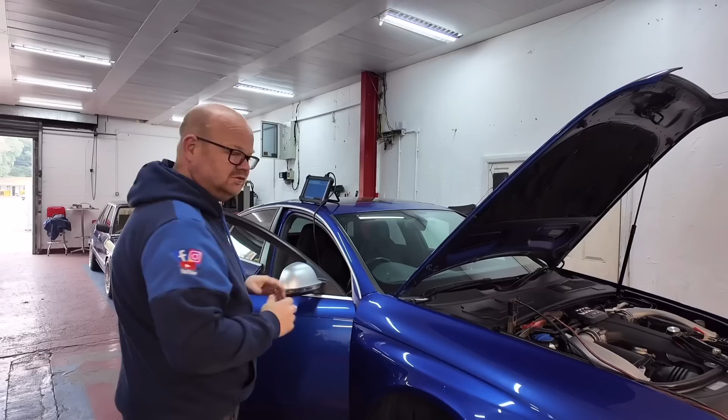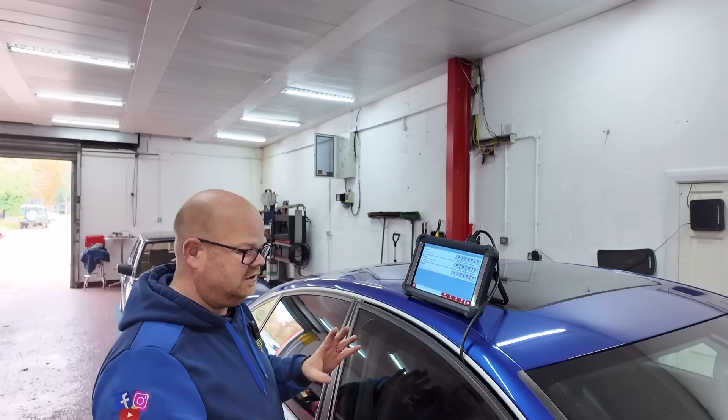Look at this, 2009 RS6. She's a beauty. In fact, let me show you this, see if you can see anything different on this. Something not quite right on this one, tell me what it is. Right, so this car's been presented to us with an adaptive headlight fault and a suspension damping fault.

So the customer's already changed the level sensor. That lasted a little while. Then the light came back on, so he's changed the headlight level control module. And now he needs to find out what's going on, why it keeps coming on. But it's a permanent code. Let's have a look.

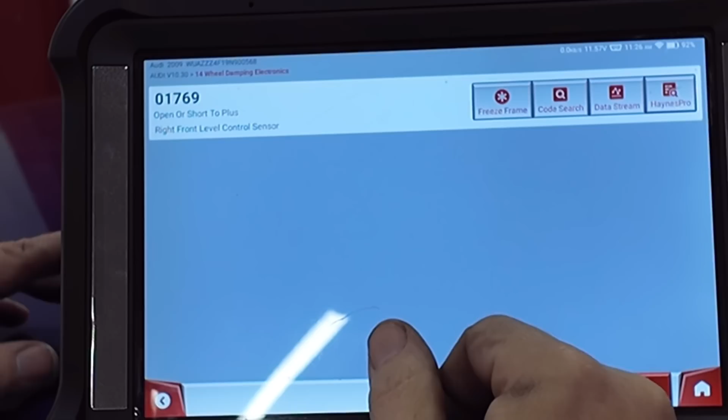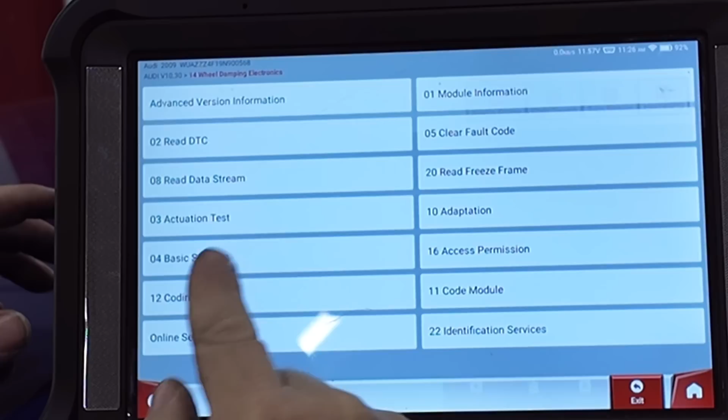Okay, so in wheel damping, we've got open or short to plus, front right level control sensor. So that's obviously your front level sensor. Let's have a look in headlight range. It's got 3 faults in that one. Right, so the control module, which is already changed, isn't coded to the car. It's had no basic settings or adaptations done.

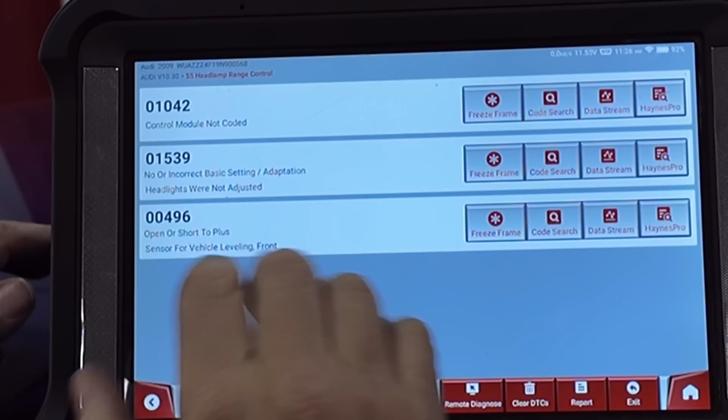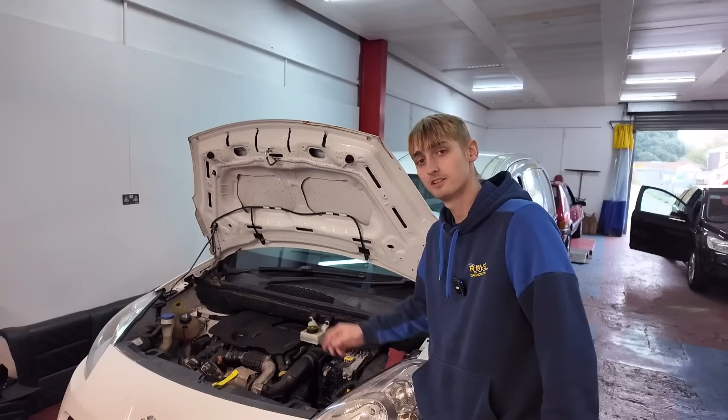And we've got open or short for the front level sensor. So it looks like we've got 1 fault. What we're going to do is put the original control module back in, see if these 2 clear, and see if we've just got the level sensor fault on there. Let's go from there. Welcome back to our regularly scheduled show.

We've got a Peugeot Partner. It's come in with a fan fault. The customer stated that when you turn the engine off and the fan's been running, it doesn't stop until the battery goes flat. So I did confirm the customer complaint. And yeah, it just keeps going and going. So I disconnected the battery, made it stop.

We've got a couple of codes in there, so I'm going to take you around to the scanner and show you what we got. We got one for outside air temperature sensor and glow plug fault. Both of them can set the fan off. So we're going to find out which one it is, rule it out, and I'll show you the testing procedure for this one.

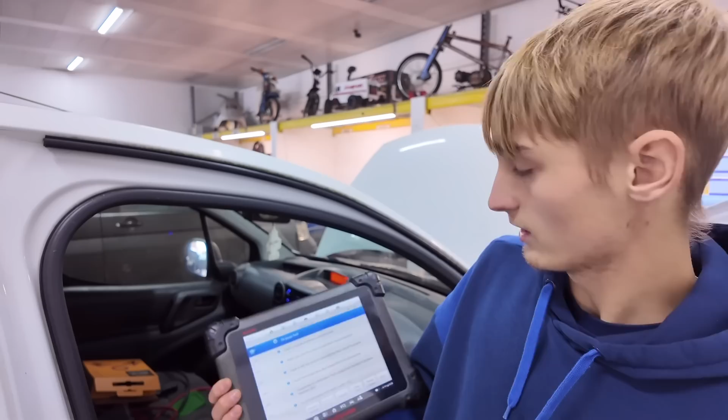Right, ladies and gentlemen, here we are. We got a fault in the BSI for outside air temperature sensor. To find out which one it's going to be, either the glow plugs or the outside air temp, I'm going to go into the BSI on the scanner, deactivate the outside air temperature sensor, run it up a little bit and see if the fan kicks on.

If the fan doesn't kick on, we know it's this. If it does kick on, we've still got a fault somewhere else, so we'll have to do more testing. So I'm going to do it now, live on camera. External temperature sensor present. We're going to make that absent. Configure. There we go. It's absent now.

So we're going to start it up, give it a few light revs, because last time it came on after 2-3 revs and literally about 5 seconds. We'll go around to the front. Right, so we've revved it up, run it up for a minute, and the fan shouldn't be on. And there you go.

So that shows that we've got a fault with the outside air temperature sensor, and that's what's causing the fan to kick on and stay on. So now we're going to go to the outside air temperature sensor, make sure we got what we need, run some tests on it, and see what it tells us.

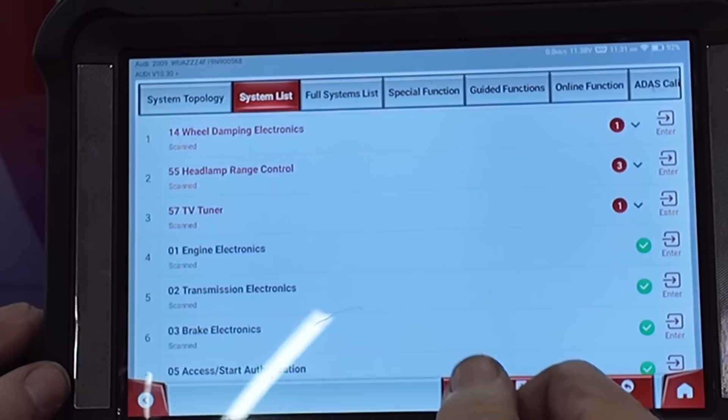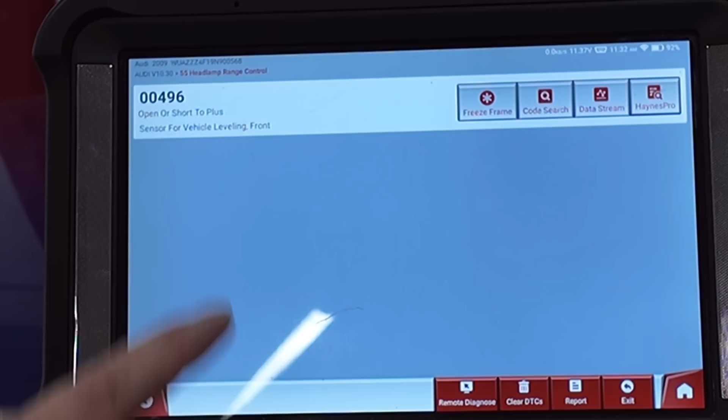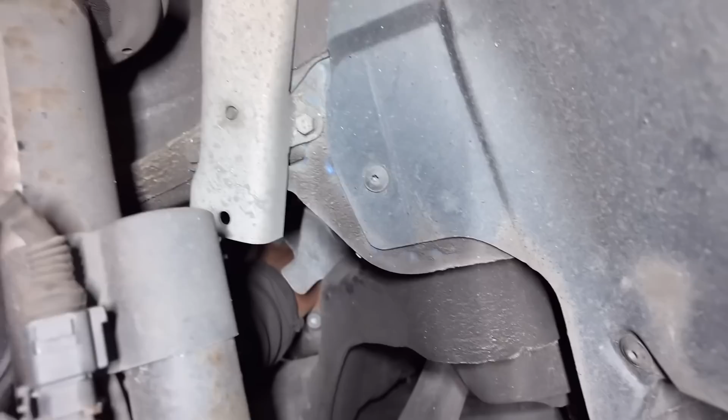Right, so we've put the original headlight range control unit in. The coding faults have gone, so we're still back just to the level sensor. So we know it's not down to the module. Let's start doing some testing. So this is a bit of a weird one. We've had a look into it, jacked it up, and it's got no real level sensor on it.

So we look the other side. We've got a level sensor on the left hand side. So apparently it's got a right hand level sensor fault, and it doesn't have one down there. It's got no wire in there, it's got no arms there. The part where it bolts on is just not there. And the light was on when he bought it, so it's not as if somebody's removed it or anything like that. So not really sure what's going on there. It's a bit confusing.

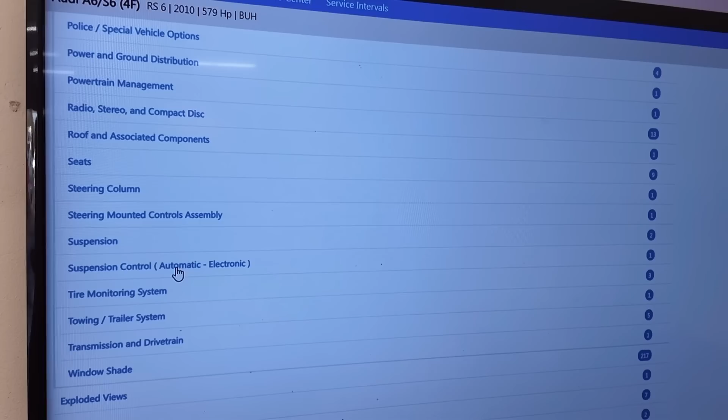So I've disconnected that sensor, the other side, and it still says right hand side sensor. In the headlight leveling, it just says front sensor. In the adaptive, it says front right, but it hasn't got one on the front right. So we're going to check the diagrams, see what that says. Right, so as you can see, we've got two different types of suspension on this. So we've got adaptive suspension from 2006.

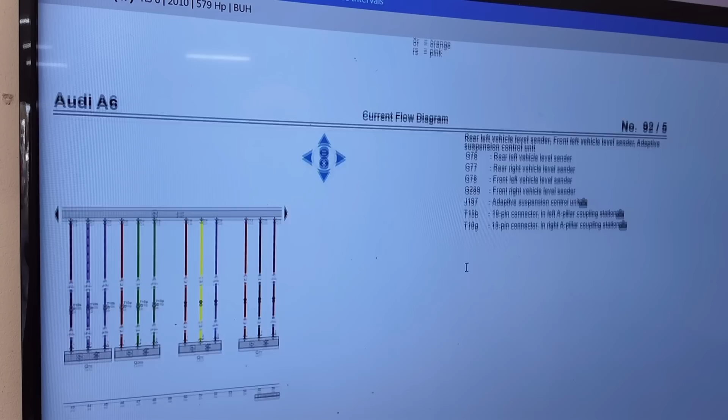And on this, it shows 4 strut valves, which apparently this has got, and 4 level sensors. We don't have 4 level sensors, we've only got the one. So we came out of that and went back into the other suspension setup, which was down here. So automatic electronic for the RS6, which I've got.

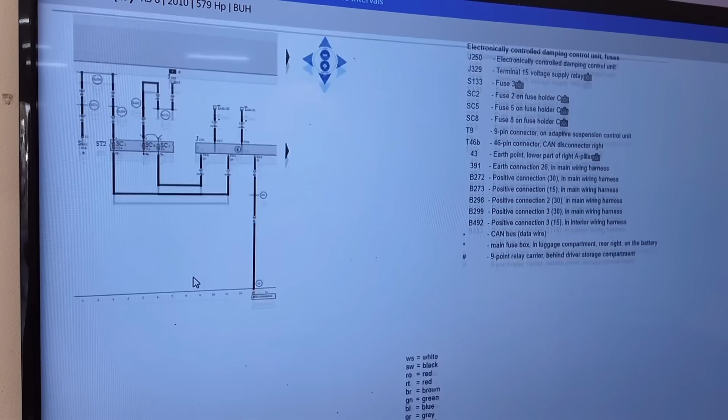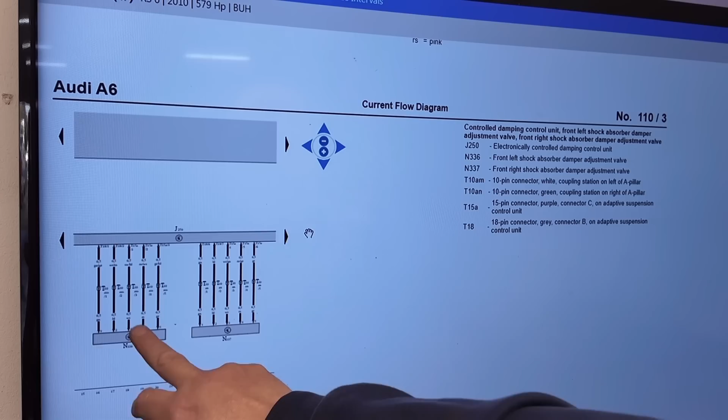So if you go into RS6, it just has front left shock absorber, damper and adjustment valve, but that has 5 wires going to it. So what we're going to do, we're going to disconnect the left hand side one, see if we get the same sort of code up, and then we'll see whether we're going down the wrong route or what's going on. So right, let's go and have a quick check over.

Right, bit of progress on it. We've just connected up that front left-hand height adjuster. That code's cleared in the adaptive lights. No lights on, no nothing. So possibly a bad connection on that. Still got the code for the right-hand side height sensor, or whatever it's called. Let us go into it now.

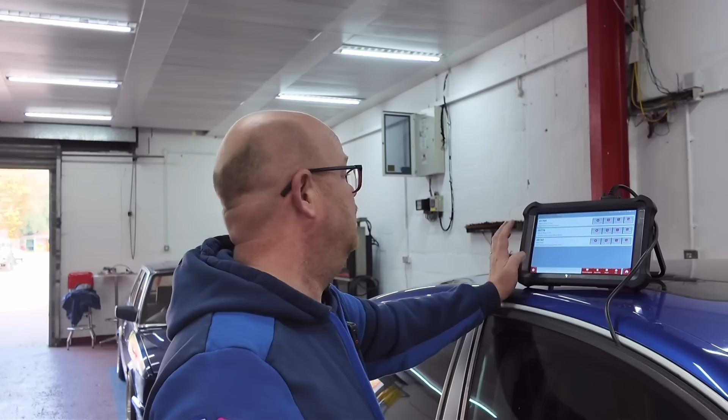So front right level control sensor. So we know we've got a fault on this side. I've disconnected the shock the other side, damper, whatever you want to call it, and that's come up with front left level control sensor. So it looks like the sensors are actually built into the shock, not that level control. Because we've got 2 faults and the customer's already played with it and they're telling us, oh yeah, it's this, it's that, sort of throwing us down the other direction.

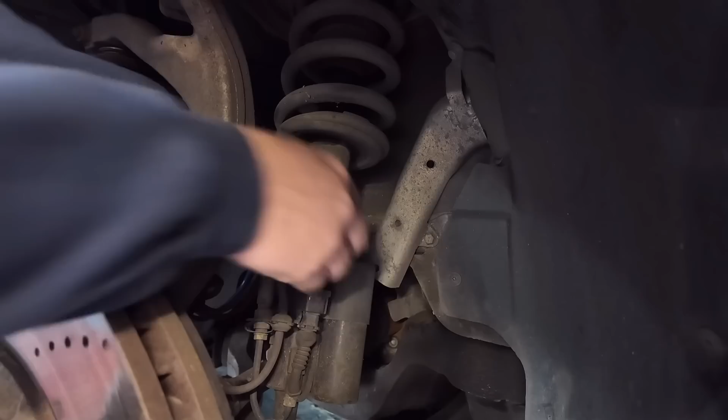So we sort of know that we've got a fault on this side. Luckily, because we've got the other side off, it's all jacked up, wheels are off. We can check what we've got on that one, check what we've got on this side, and see what's happening. So, we're just going to do a quick check. So we've got a Carlos Fandango camera thingamajig. I haven't even got a torch in this. Look how bright it is. That's all coming from there.

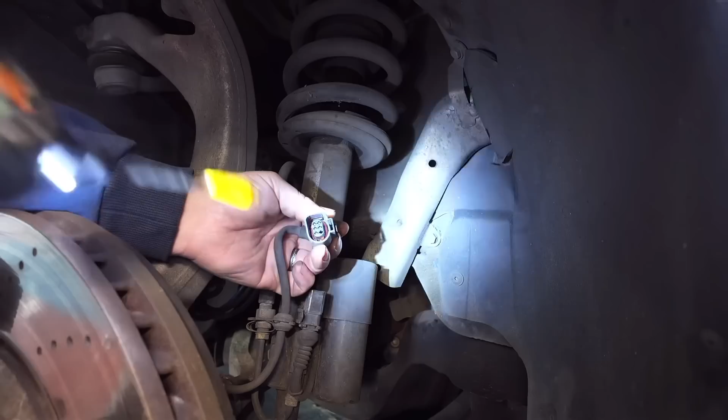So, I'm going to do a quick check on these pins, see what we got. So we've got an earth, 2.2 volts, earth, 1.5 or 2 volts, and a dead wire. So pin 5 is completely dead. I'm just going to check the other side, see if that's meant to be like that, and do we need to get the control module out and test backwards, or have we got a wiring fault where it flexes.

So we've got an earth, 4.9, earth, 5 volt. So this number 4 was about 2 volts the other side. This is 5. And the one that was dead has got an earth to it. So we've got an issue on this pin on the other side.

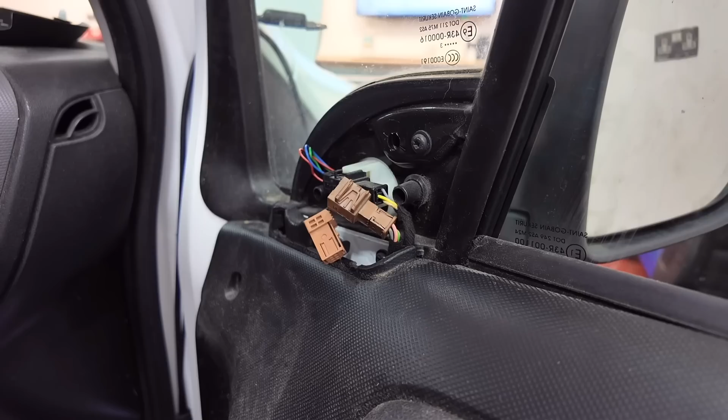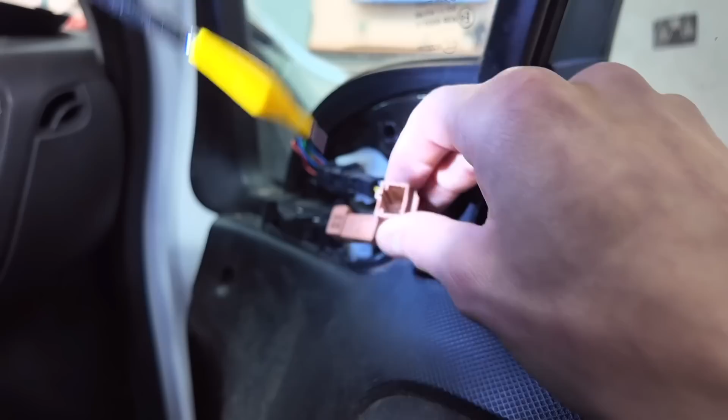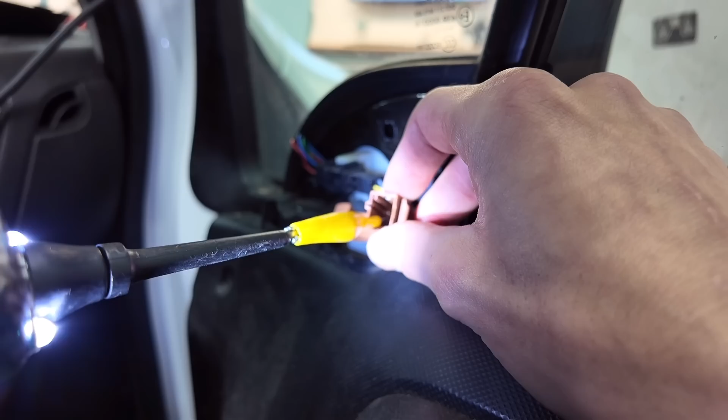So this is the plug for the outside air temperature sensor. It is actually in the bottom of the wing mirror, just down there. So what we've done is we've pulled it. We're going to test that we've got our live and earth. It should have about 5 volt and a single earth in there. So there's the earth. And there's no live on it, so that changes the ball game slightly.

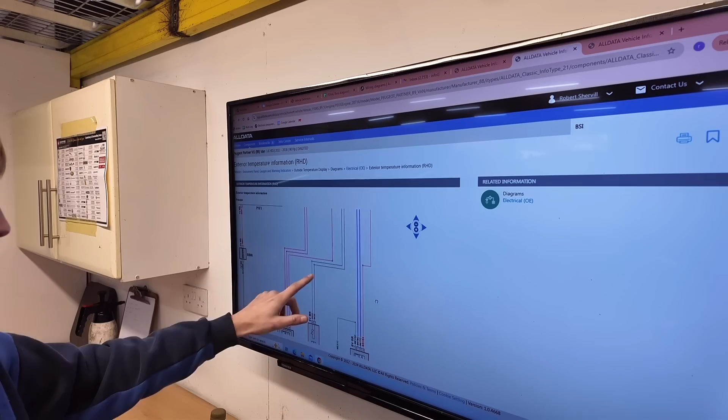So I've got the wiring diagram up for the sensor. This is the outside air temp, and it goes all the way back up to the BSI. So what I'm going to do is go over to the BSI, get it all stripped out, and we're going to test the live and earth at the BSI, because if we've got live and earth there and just earth down there, that means we're going to have a broken wire somewhere between the BSI and the sensor.

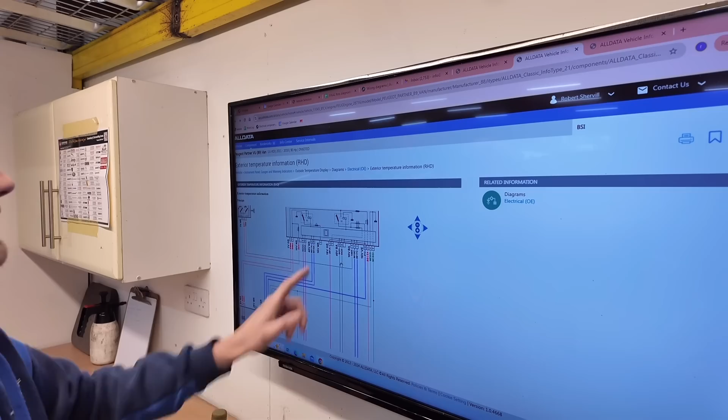So these are 2 wires we're going to be testing. It actually took us about 5 minutes to work out what plug BA was, because it's not listed as BA on the BSI. So we had to get another diagram up.

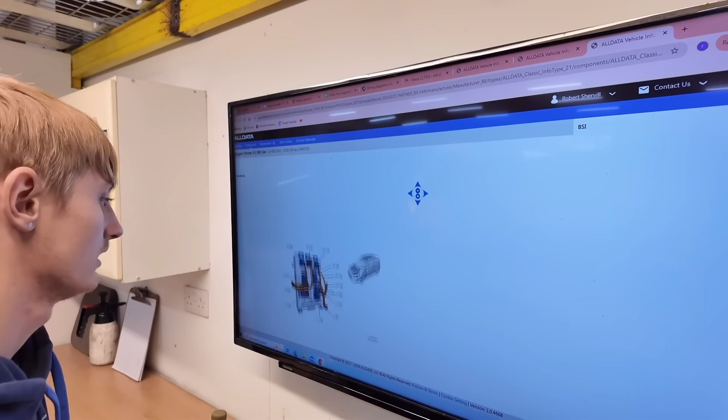This is the BSI unit. BA is that plug there. But just to make sure that we had it right, we came over to another pin out diagram. So the BA is actually EH1. So we're looking at pin 8 and pin 18, there we go.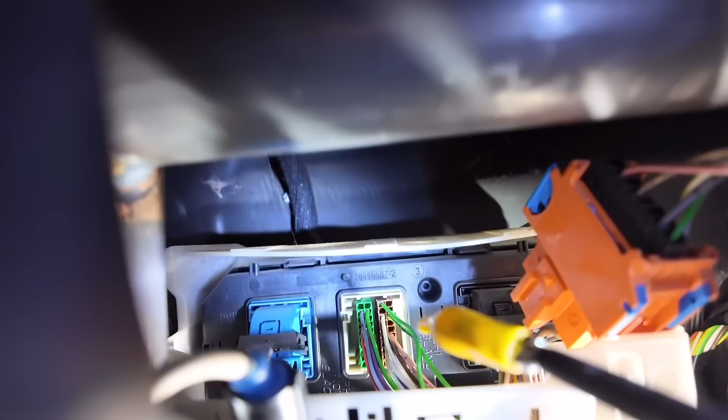So we're going to go to the BSI, test our live and earth from there. So that little brown plug there is the one we're looking at. That white wire and the green one next to it, this one here, are the ones we're testing. So that's the earth. And I don't know if you can see on there, but we've got 4.6 volt. Right, so that means we've got a broken wire between the BSI and the sensor itself.

So we're going to look at the most likely place it's going to be, which is where the door crease is, where the loom comes from the door into the car. We're going to have a look there first. If it's not there, we're going to cry ourselves to sleep at night, because it can be anywhere. Right, as guessed.

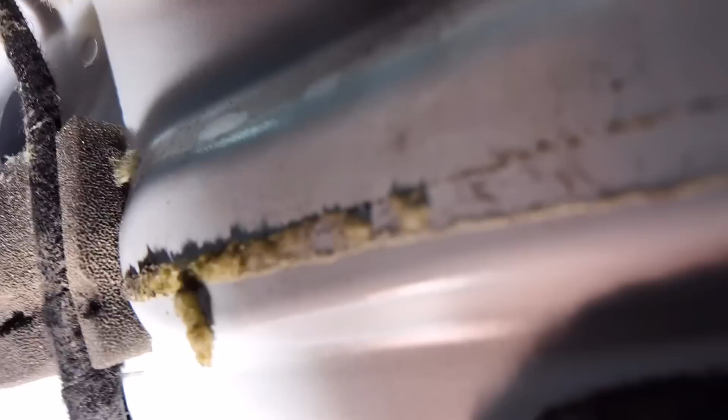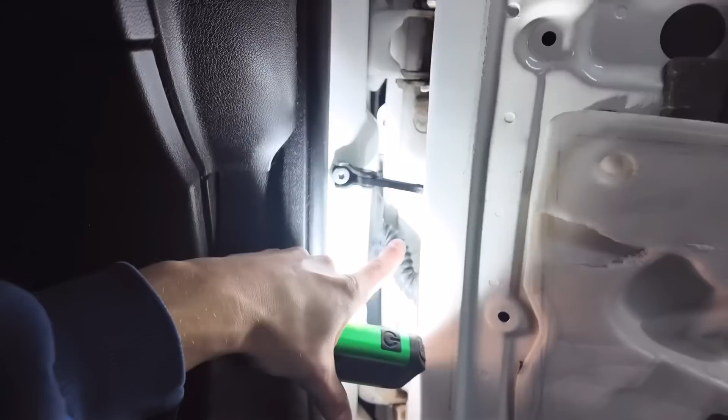That is the wire for the outside temperature sensor, and it's broken off inside the door, so we're going to have to get that bit of trunking off, do the repair, put it all back together. Job's a carrot. So I'm going to repair that, and I'll come back to you when it is done.

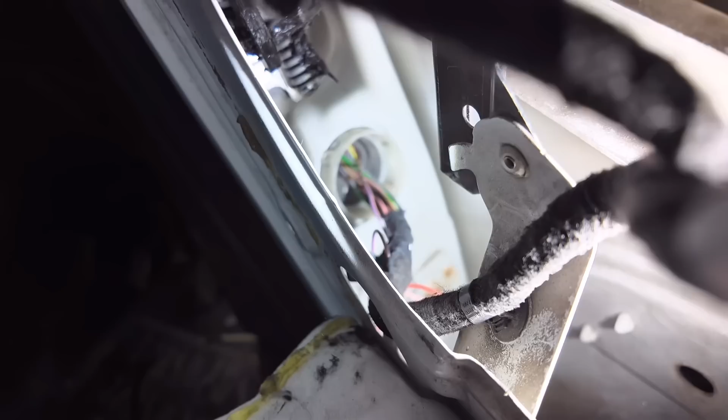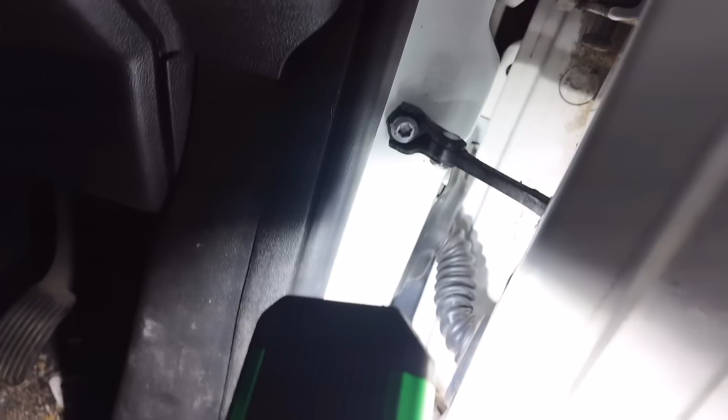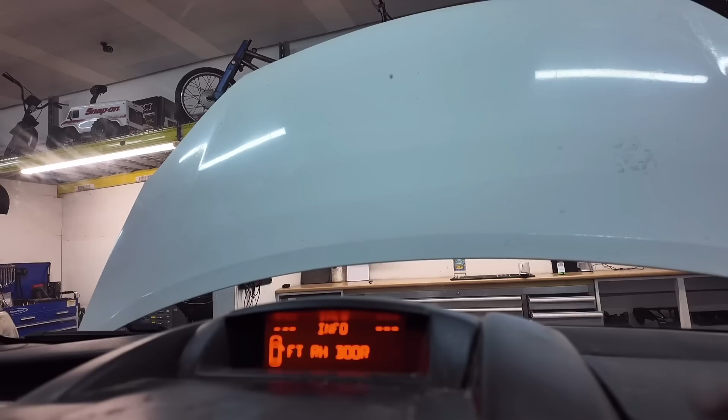So as you can see, that wire there's my repair. What I've done, I've run a new length of cable all the way through that little trunk in there, soldered it all back up, and I know it's working without even starting it up and running it up, because is it going to work? There we go. We know it's working because we've now got the temperature on the dash, so I don't even need to run it up, but I'm going to anyway.

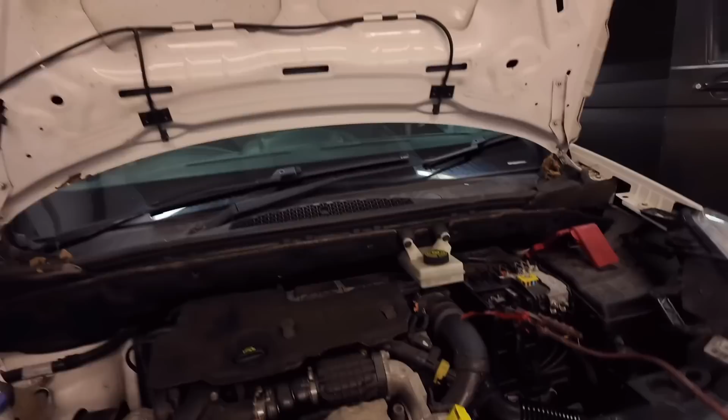Give it a couple of revs. At which point last time the fan would be on by now. So let's have a look. There we go. We've got no fan on. So that one's all done. I've just got to put it all back together. The door card's back on. That one's done. Job's a carrot.

So I think it's going to be a wiring fault. Well, it's definitely going to be a wire. It's either going to be the module or the wiring. But the chance of it being a module, which is behind the glove box, I would think it's going to be on this flexing wiring. So we're going to have a quick visual check on that wiring. It could be broken internally, so once we've done that, we can put our meter on there and just move the wire slowly, see if we're getting different readings. But let's give it a quick visual inspection and take it from there.

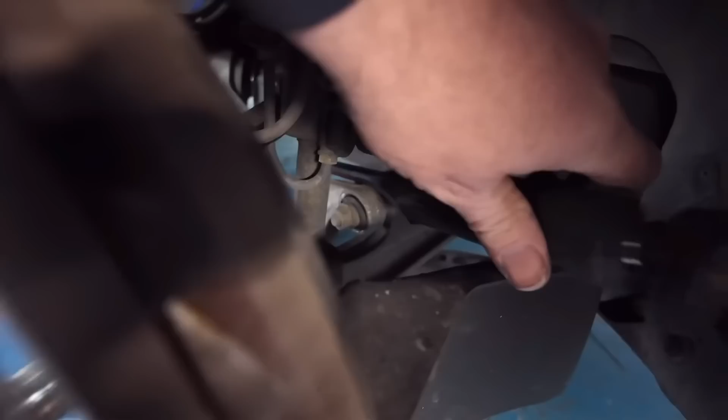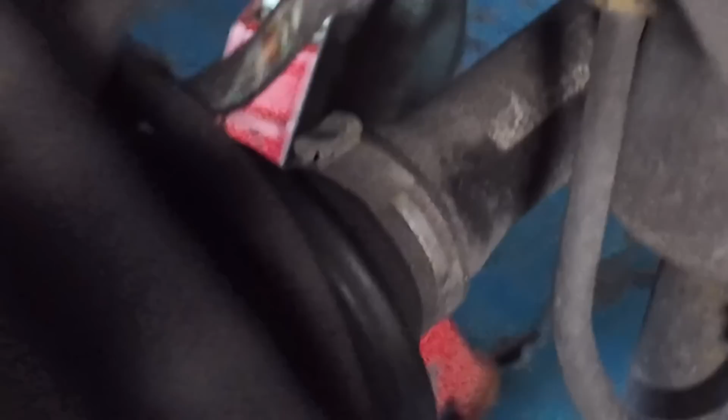Well, look at this. Right, so we've got this wire in here, comes all the way down and around to this sensor. Down here, it's actually better with no light on it. Look at that, all rubbed through. I would say possibly rubbed on the CV gaiter. So that is what we're going to need to address. So yeah, looks a bit confusing.

It was a bit confusing because we had two faults. Left-hand sensor, right-hand sensor, front sensor. But again, the customer's sort of thrown a curveball saying that he's changed the leveling sensor module and changed the level sensor, stuff like that. Yeah, we should have done it the way we would have done it normally. But we did have two faults. So we've disconnected that sensor, connected it back up, that fault's cleared. We know we've got some wiring faults on this. So we'll speak to the customer, see if he wants us to do it, he is a trade customer, or whether he's going to buy a new loom and cut that all in. So I think we're done.

So I've been to the customer about this RS6. He's happy to carry on repairs. He's going to look up to see if they do a repair loom, which I'm sure they do. We can't get a good enough repair where it's actually broken. It's on a flex, so that's not going to work. So yeah, we're done with it. Going to get it back together, get it out, go on to the next one.

It's been a couple of days, got quite a few little jobs done. We've got this one back in tomorrow afternoon. This one, we've fitted an inline controller that converts the temperature sensor on the engine, which is a modern engine, to whatever dash we've got in there. We've got all that wired in, but there is some sort of configuration. You have to tell it what range the sensor's in and then what range the dial is in. So we're going to try and work through that one tomorrow.